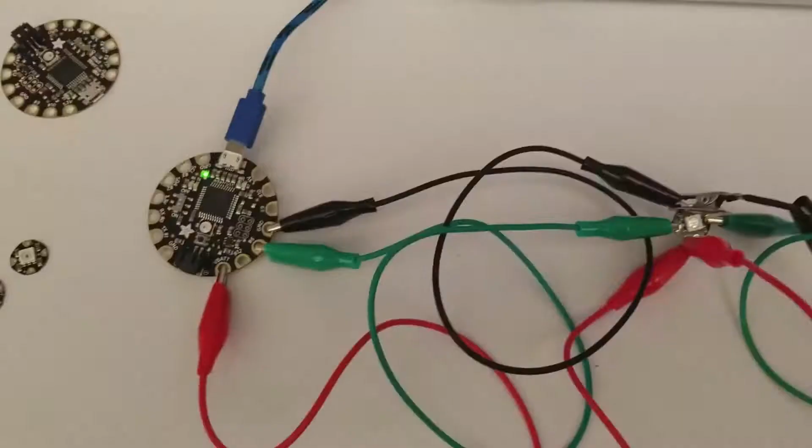I just finished up a personal project, and I'm about to move on to the next one. I actually wanted to circle back and try my hand at a project I had an idea for a while ago. About a year ago is when I started exploring electronics and getting into 3D printing, prompted by my boss at work.

I grabbed a good idea notebook and wrote down some ideas. There's a bunch that I thought and still think would be good, but I just didn't know how to do them yet. Some ideas I started trying and realized I didn't know how to make a specific piece of that, so I thought of a different personal project that would isolate that one piece and let me learn it in detail, then circle back and learn how to fit it into the overall project. This is one of those projects.

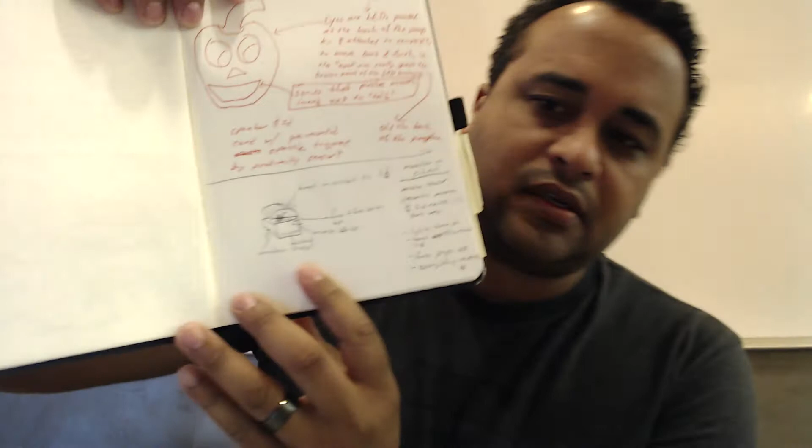So I wrote down in my notebook, it's a little small, but the idea of having a treasure chest with a little demon on the inside that would open it with its claw, maybe have light up lights and then close it, and put a little sensor on the front so that when someone walks by, the demon would open. Maybe play sound, maybe rattle the box a little bit. I'm not totally sure, but the core functionality was opening and closing the lid of the box.

I didn't want to do just a servo that pushed open a lid and wasn't attached, because I knew I also wanted to potentially do projects where maybe the lid was on the side, opening like a drawbridge to open and close. Basically, I wanted discrete control over how the lid was opening and closing, and not be dependent on gravity to hold the lid down. So I couldn't do that whenever I started.

I tried laser cutting some parts to do the 4-bar linkage idea to open the lid, but I just didn't know enough about creating that, and made a couple of projects that kind of bent themselves in ways that weren't desirable. So I set that aside and came back to it later.

Now that I have a little better grasp of Fusion 360, I've been able to circle back to this project, not because I've gained a lot of knowledge about 4-bar linkages. I have a friend who told me about the idea, explained it and actually gave me the pages to calculate the linkages, but I only have a really small period of time, usually in the mornings right before work, to work on personal projects. Sometimes in the evening, but the only dependable time is in the morning.

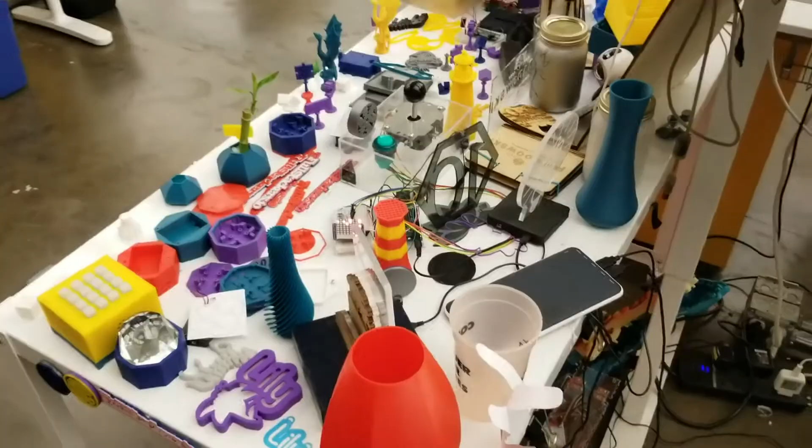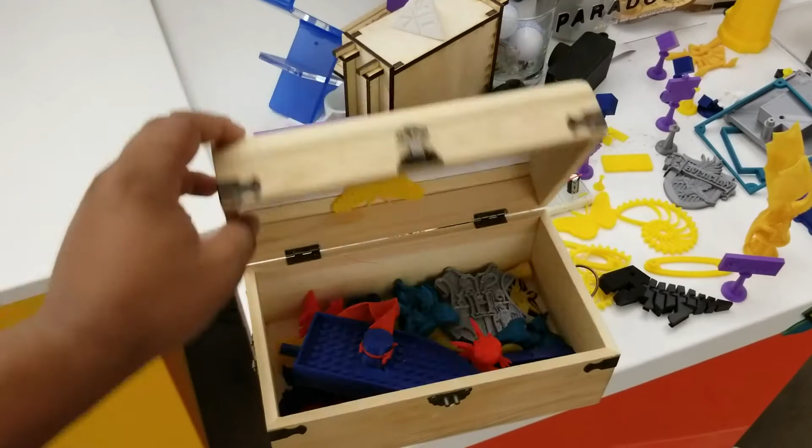So this is my side table at work, and one of the things on it is this treasure chest that I use to put extra 3D prints that I do whenever I'm not printing an actual job, that I set out here so the kids that come through the office can grab a toy.

And I actually got this for one of my early projects, which was to try to make a box that would stay closed, and then I could program to have a sensor on the front and then open, and have like a little thing on the inside that was lifting the handle and then close on command, and either run that from a sensor or run that through a socket connection so I could trigger it from a web app or a phone or something like that.

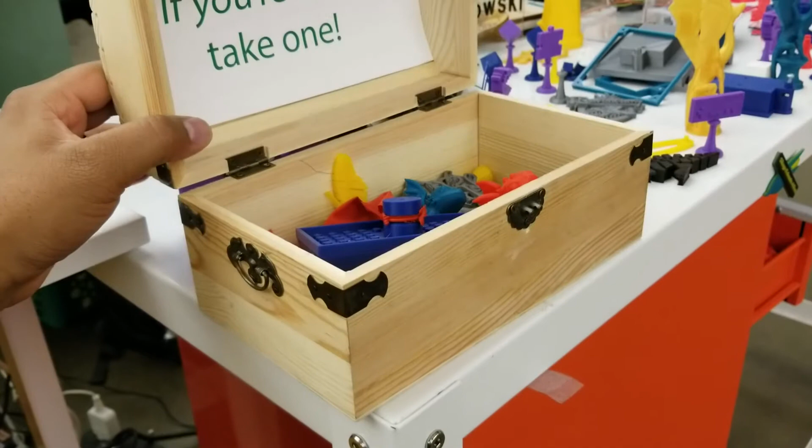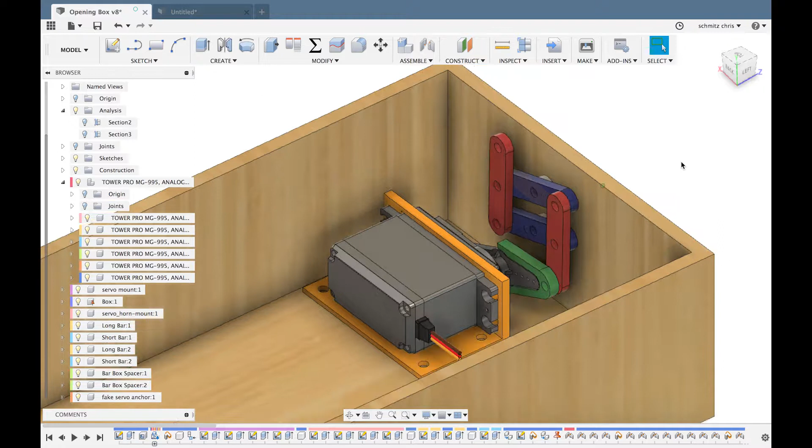I was early enough in my electronics learning process that I didn't really know how to accomplish that, but I'm getting close now. So here's a model that I rattled out last night. This is really just a rough sketch to get the concept into Fusion.

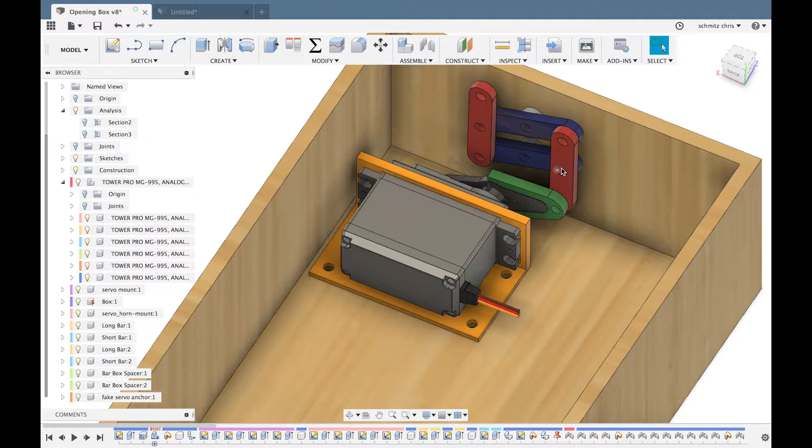I'm probably going to go back, blow all this away, and start over, modeling the actual thing. I pulled a 3D model of a servo from GrabCAD that I have in my workbench, then created a servo mount to mount it into the box, a servo horn mount, and then each of the arms for the 4-bar linkage I wanted to build out, plus little spacers for when I attach this to the side of the box.

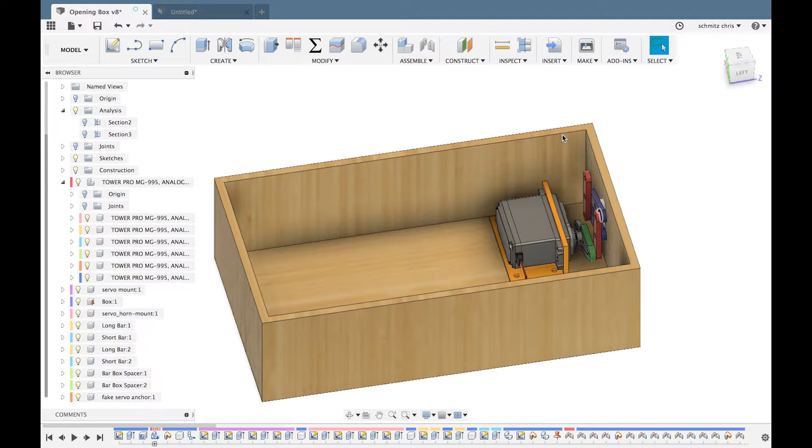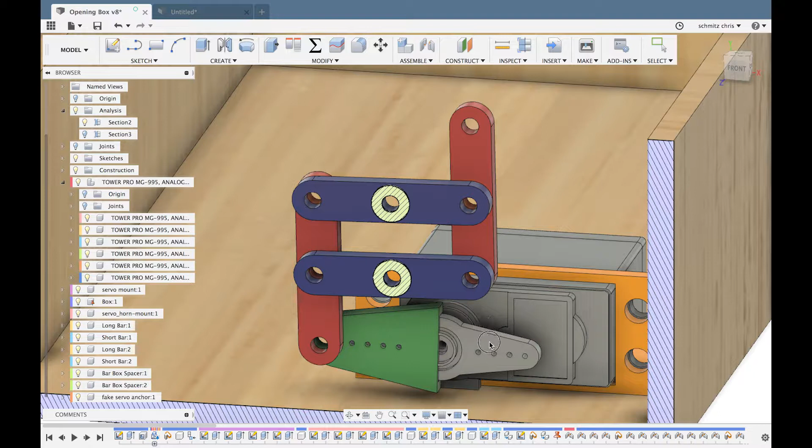There's something that I did that messed up the joints, or at least messed up the freedom of movement for the joints. I should be able to move it more than this, but I can't at the moment, and I think I really just added too many joints. But the general concept is there now.

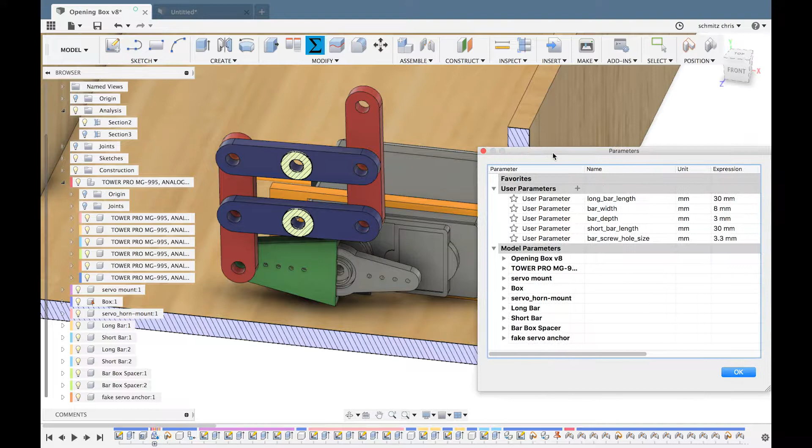Something else to point out is that the whole model is parametric. I pulled out the dimensions for all of the bars into user parameters, so I can come through here and make adjustments as needed to the bars and feel out exactly how I want things to fit together.

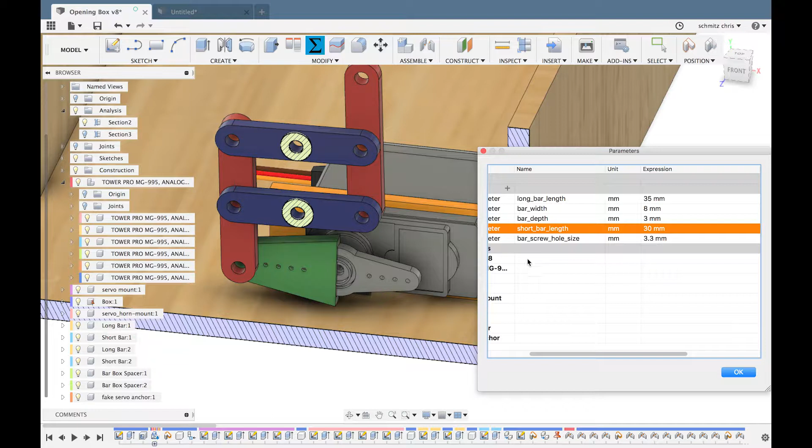So the length of the 2 sets of bars, the red bars and the blue bars, are the long and short bars, and they all have a consistent depth and width. That's the whole thing, and I want to show how I built all this.

I'm going to pop open a new document and walk through how I created the bars and how I can adjust them using the user parameters. So I'm going to pop open a new document and define some of these user parameters.

You could do this up front. I like doing it up front in this case because I know the things I'm going to want to be able to adjust without having to go back in the history, but you can also come through and add these in after the fact. So I know I'm going to have a consistent bar width.

We'll make it 3, and bar depth, make that 3. Actually, let's kick this up to 5. And then I want 2 sets of bars: I want the long bar length, which we'll do at 30 for right now, and then a short bar, we'll do that at 20, and then we can come back and adjust these as needed.

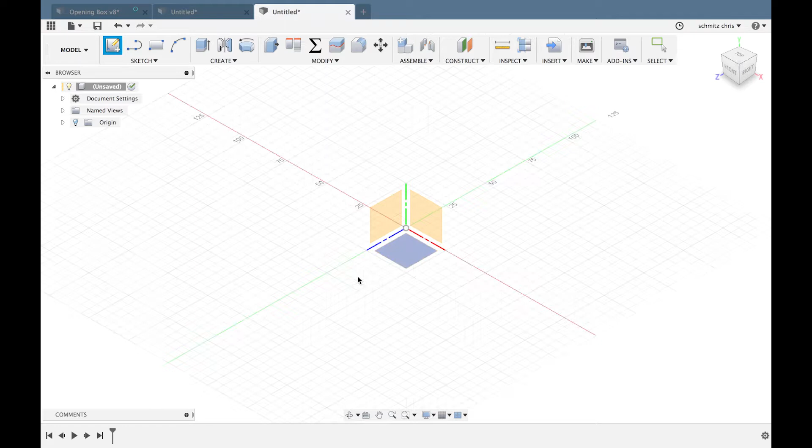Now that I have those defined, I'll create a new sketch. It doesn't really matter which plane you're on, so we'll just start on this one. The first thing I'm going to do is grab a center-defined rectangle. You can hit S to bring up that little palette.

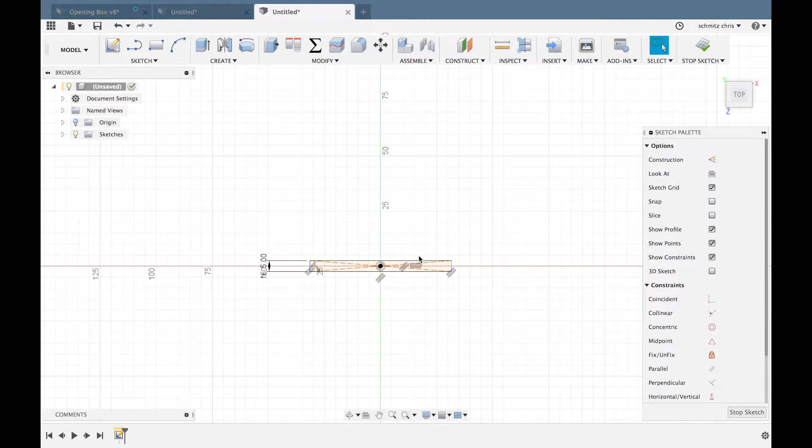And then I want this to be the bar width. Oh, I forgot to switch over to dimension on the other side, so I'll do the long bar first. So now we have our bar defined, or the main body of our bar defined.

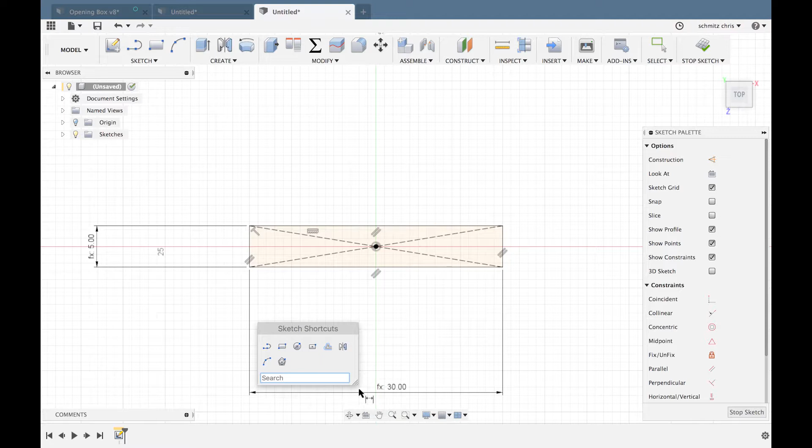So we just need those circular ends and the screw holes. I'll grab a center diameter circle, and at one end of the bar I'll pull this out and hit the D key so I can redimension it, and set that to the bar width as well. We could use a coincident constraint to pull one of the edges of the circle to the edge of the bar, but we've already got the dimension, so might as well use it.

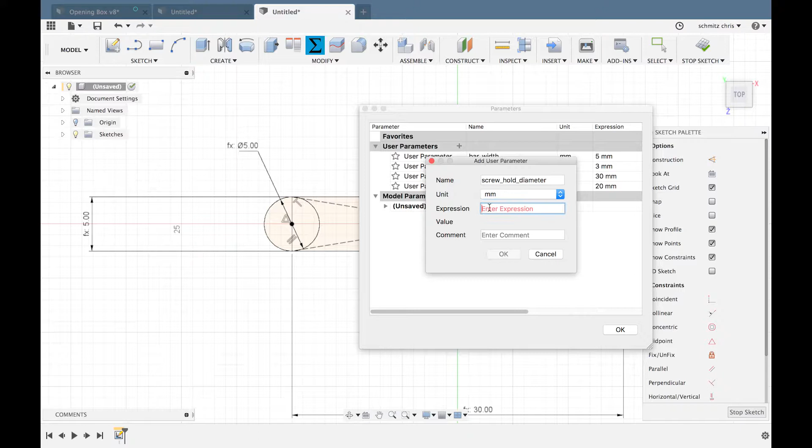One thing that I forgot to define was the screw hole diameter. I know I'm going to use 3mm screws, and I'm going to give it just a little bit of clearance for the tolerance for my 3D printer.

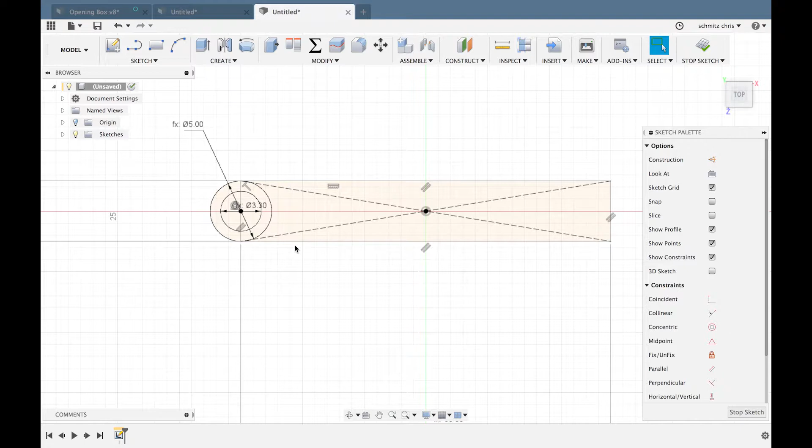We'll pop open another center point circle and put that in. So now we have one side defined, and I want it to be mirrored onto the other side. So rather than drawing all of this over again, I'm going to grab the line tool, which is just L on your keyboard, and put a line down the middle of this bar. You can see that it has the midpoint dimensions here, so we know that it's in the exact center.

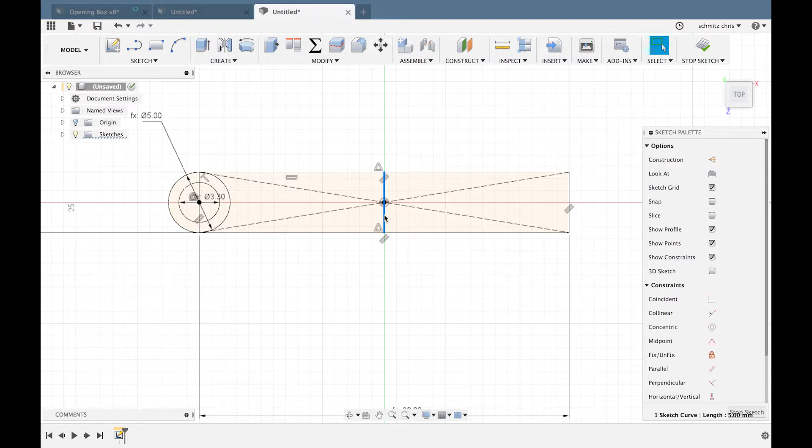I'm going to click on that and turn it into a construction line, because I don't really want that for the form of the shape that I'm making. I just want to use that so I can then use the mirror command. So I'll select the two circles that I want to mirror, and then I will mirror it across that construction line that we just drew.

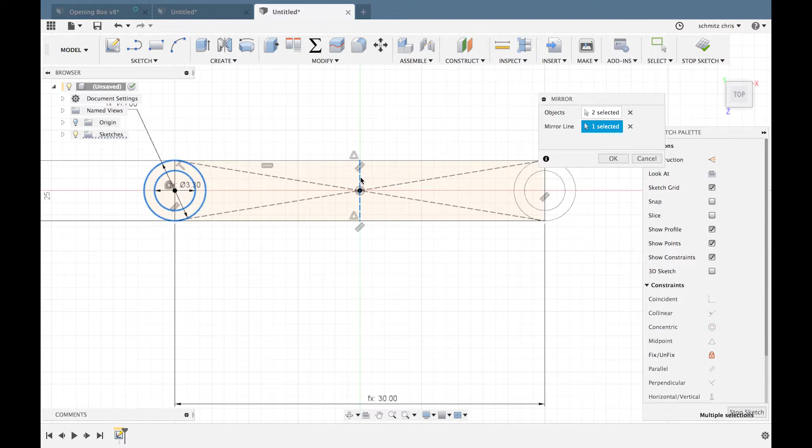Sometimes whatever you had selected before will be included in the objects you select. So you can either click back up here and unclick that, so we're back down to two objects and now the line's free to mirror across, or you could just clear it out and select the lines again. Either way, we'll grab the two circles and then grab that center line, and we can see a preview of that mirror.

So now that we have that whole thing set up, we can extrude that out into 3D space. I'll grab just the parts that I want. Notice how, because it is a construction line, it doesn't split this part of the profile into two halves. And I'm going to pull it up to bar depth.

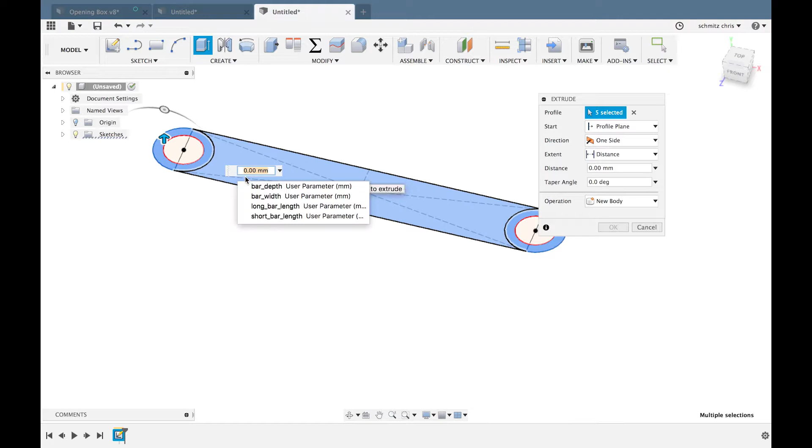Right, so we have one bar. And from here, we can go through and adjust things like, let's double that, make it a little bit hardier.

So this is looking good. One of the things I forgot to do is turn this into a component, because I know that we're going to duplicate it. So I'm going to create a component from the bodies and call this long bar.

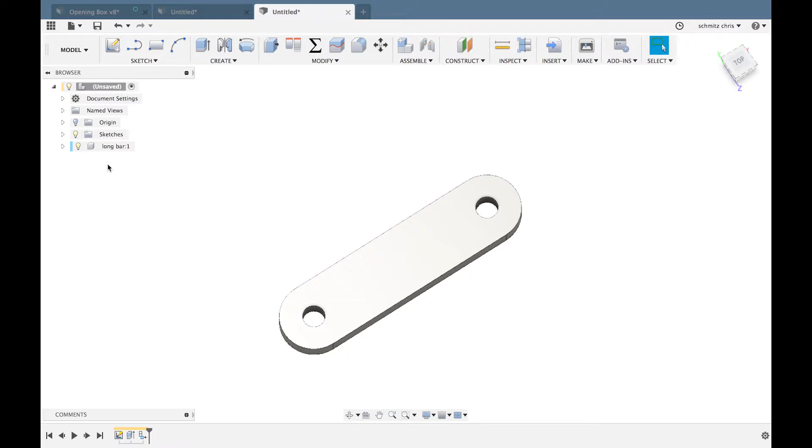So now we can come through and make a copy of our long bar. Whenever you do a move copy, one of the things you want to do is immediately before you move any of the dimensions, click on create a copy, so that whenever you pull it out, you're actually pulling out a copy instead of moving the original long bar. So this creates a copy, and when I say copy, I really mean copy.

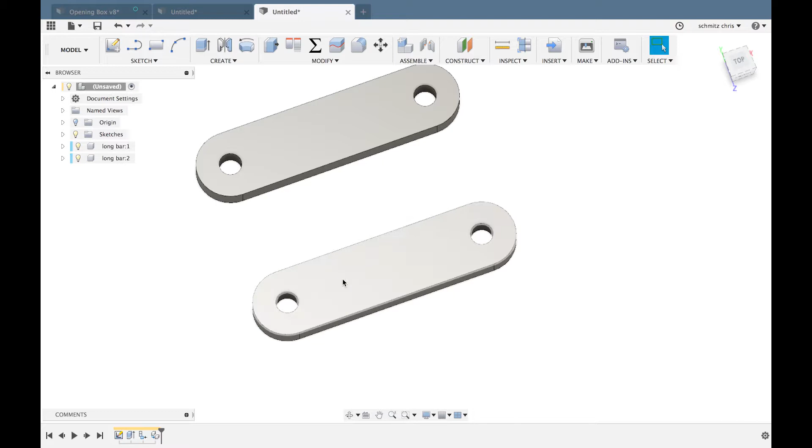So if we go through and, well, not even change the original sketch, if we go through and add a sketch and change the component itself, like if we put in the center screw hole that I forgot to add, and then extrude that, we'll use that to cut to the other side of the bar.

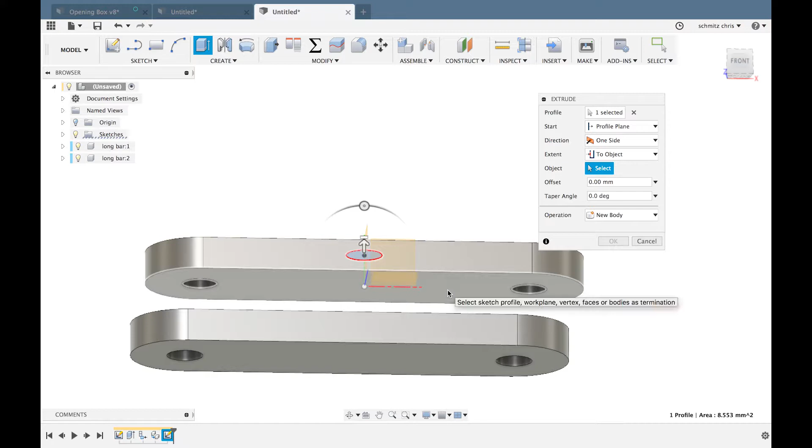Notice I'm using the to-object option and using the other side of the bar. That way, as we adjust the bar depth, this cut will continue to go all the way through. So if we go ahead and cut that out, notice that it gets added to the other copy as well.

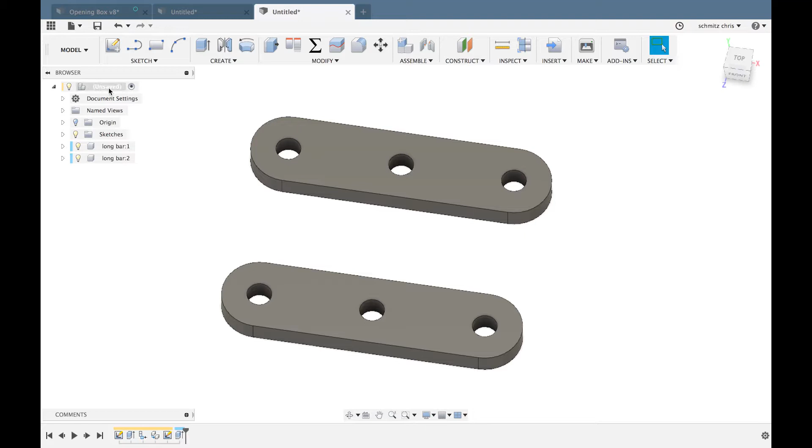So now we've got two long bars, so let's go ahead and create the short bar. Instead of creating another body, this time I'll add a new component right off the bat and call it short bar.

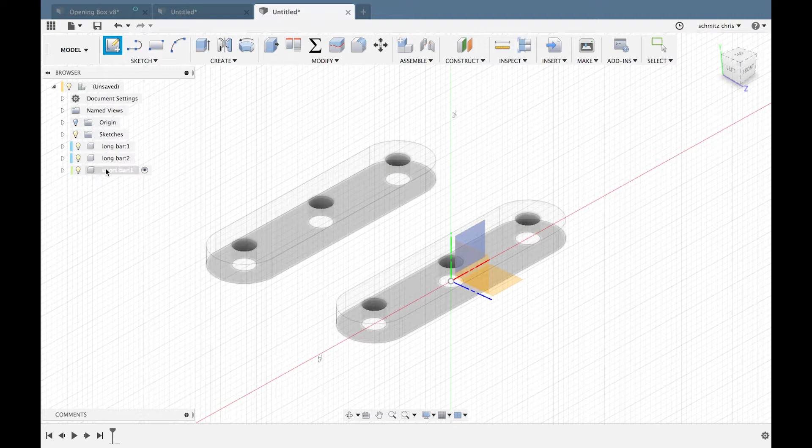And I don't want to start from the origin plane here. I know that I'm going to want this to line up with the bars I just drew, so for the new sketch that I'll be creating for short bar, I'll just use the top of one of the long bars.

And that way you can see we're drawing on the top of the bar and not on, let's see if I turn the origin back on. We're drawing on the top, it's kind of hard to see that. We're drawing on the top of the bar and not on one of the origin planes.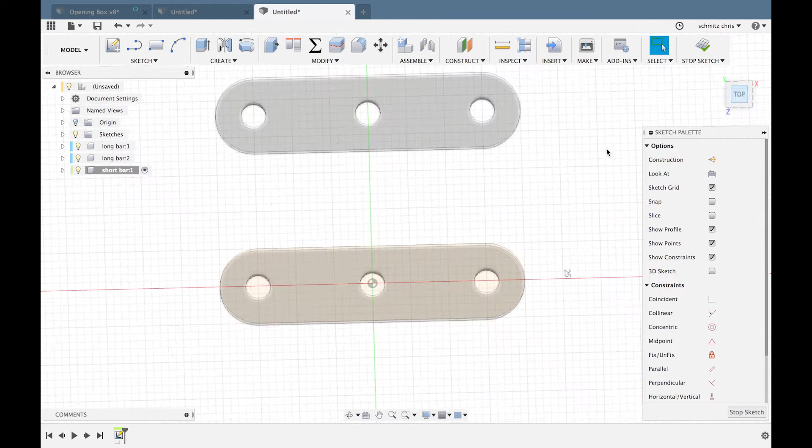So now I will create a short bar. I don't really need to line this up with the long bars, but I'm going to do it anyway just to shortcut a little bit of this, because I only have a little more of lunch to finish recording this. So we'll do bar width.

In this case, I'm going to start with the circles just to be a little varied in how I'm doing it. Make this a screw hole diameter.

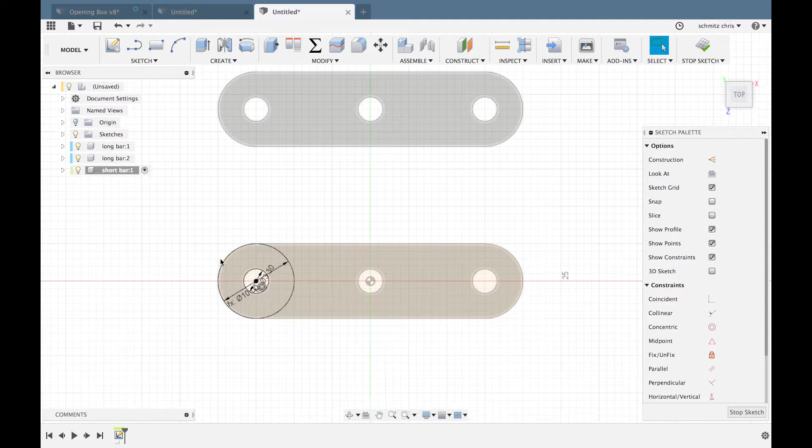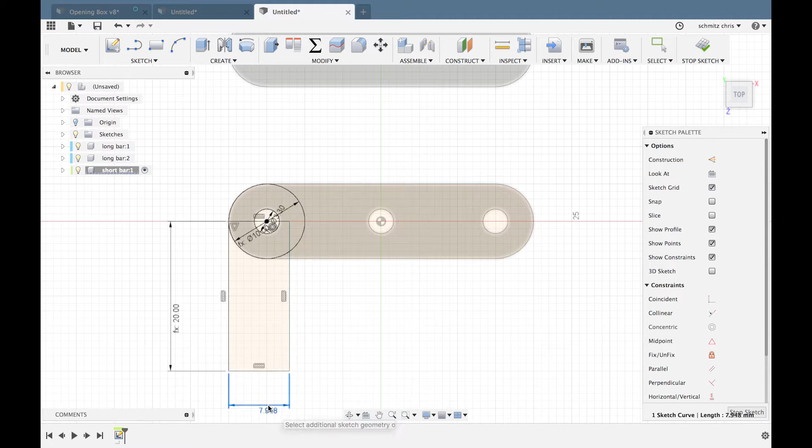And then I'll grab another rectangle and hang it off here. Forgot to dimension it, so I'll hit D and make this short bar length. And then the last thing would be to make this dimension the bar width.

All right, so same thing we did last time. I'll grab the line tool, throw a line across the middle. This time I'll leave it as a regular line. You don't actually have to turn it into a construction line. It's just kind of informative whenever you do turn it into a construction line, plus it doesn't split the profile.

So I will then grab my mirror tool and grab the two lines that I want to mirror, and then that center line that I want to mirror across, and now I've got my short bar.

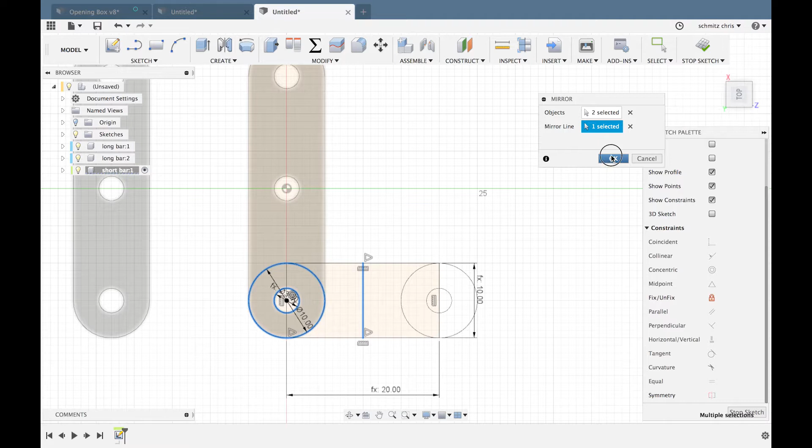So I'll extrude that into 3D space. And yeah, notice that because it's not a construction line, these are two separate profiles I need to grab now, and grab that last little chunk and make this bar depth.

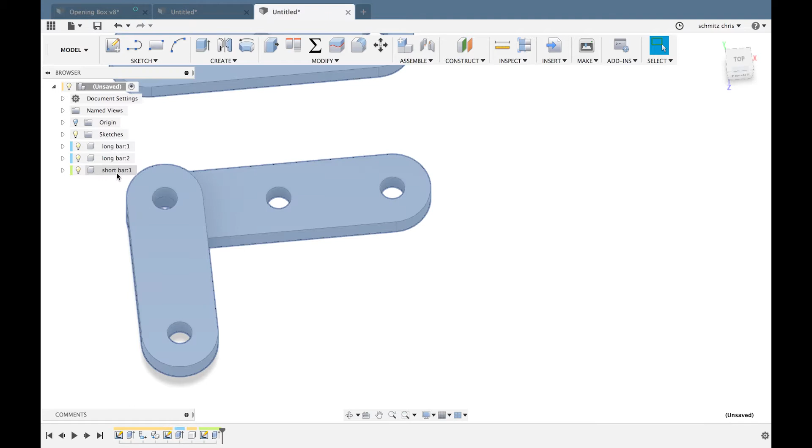All right, and then like before, I can go through and create a copy of the short bar. All right, so we've got our 4 bars. They're all parametric. I can go through and adjust various settings and see them play through.

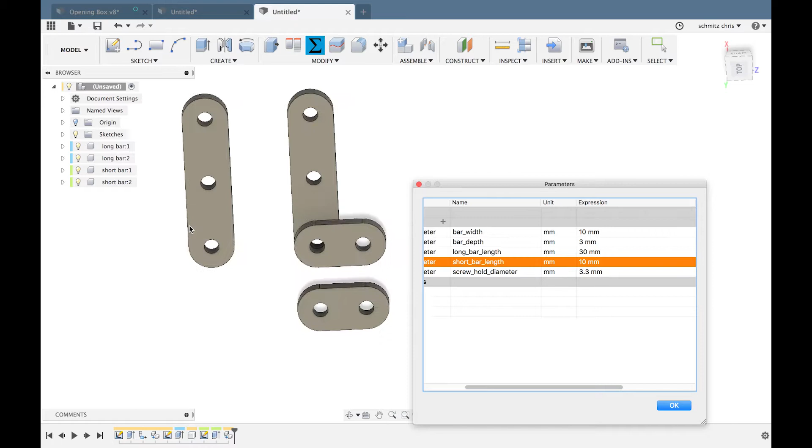Okay, just to give us a little more room. So now the last part is to joint these up. So right now these all move independent of each other, and that is not what we want. So we'll go through and start adding joints.

So the joint that we need for this one is revolute. There are a bunch of different ways of jointing, basically joining 2 parts together and then defining the relationship between them as far as how they should move. So we want the revolute. We want these all kind of revolve around each other.

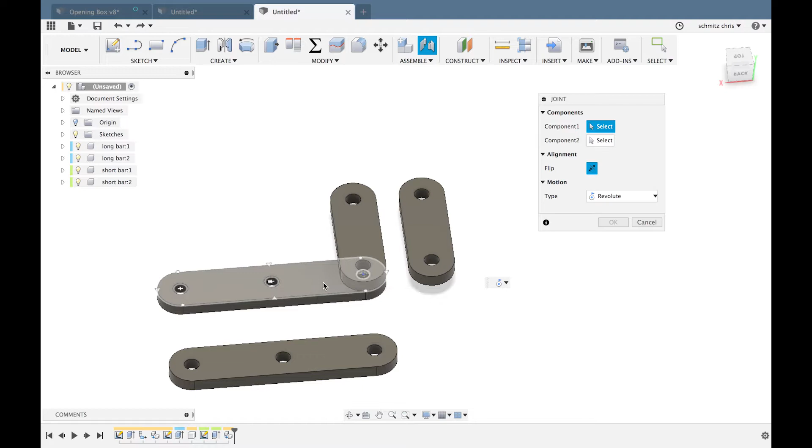So the basic steps are: create a joint, pick a profile that you want to put it on. I want to get the center hole for that body, but it's covered by this one. So what you could do is hover your mouse over the profile that you want and hold down the Command key on Mac - it's maybe the Control key on Windows, I'm not totally sure. That will snap you into different points on that profile, and that'll allow me to grab that center circle, and then do the same for the underside of the other bar.

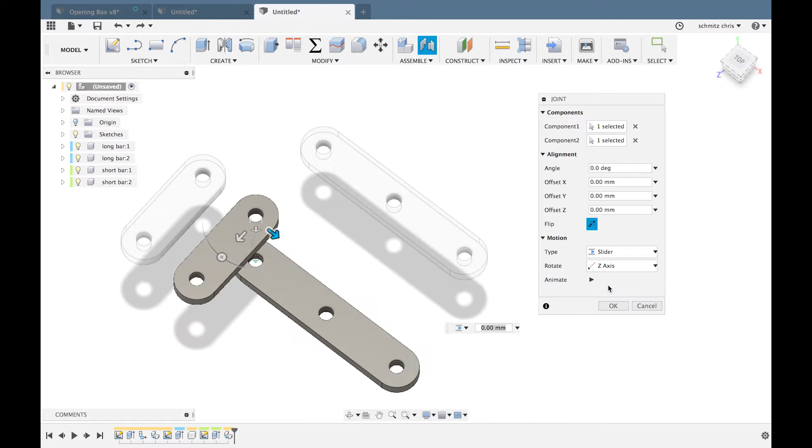So we get a little preview animation of it going around, and the sides actually matter. So we want to attach this profile to this profile. If we attached this top profile to the other top profile, it would flip one of the bars over on top of each other, so be aware of that. This is a good time to come through and check out the different types of joints that you have, to see exactly what they do to your parts. These animations are fantastic as far as getting a visual idea of what each of those joints do.

So now that we have 2 of our parts joined together, we need to go through and tell Fusion which one of these parts should be grounded so that everything else moves relative to it. So if I grab these two parts that we joined together, you'll notice, one, we're not getting that revolve we added for that joint - it's not revolving around anything, it's just moving the entire parts. And two, you can see by the shadows that we're moving the 2 parts in 3D space, and that's because we haven't told Fusion this part should be attached to the ground.

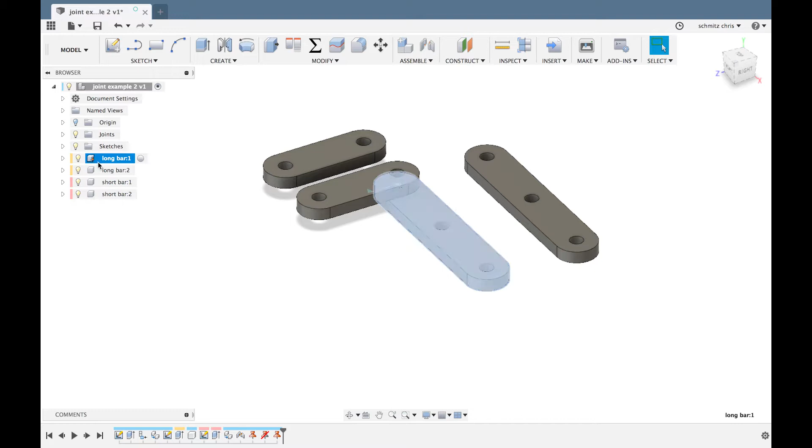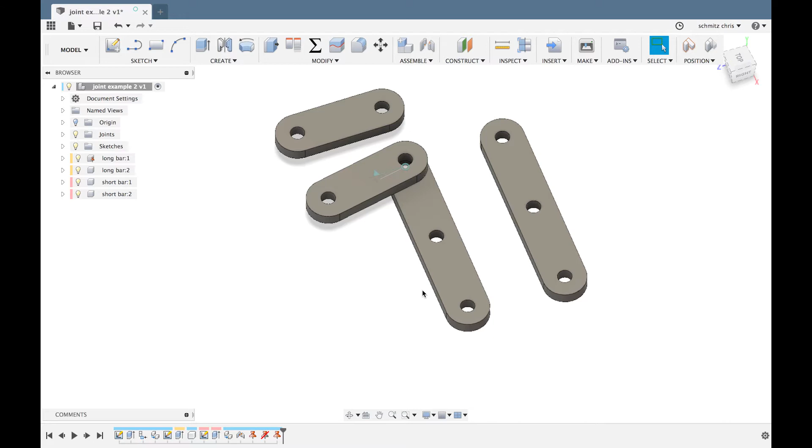The way we can do that is to right-click on one of the parts—I'll do it on just the first long bar that we created—and select the ground option at the top. That puts a pin into this component and attaches it to the ground plane. Now we can move that second part relative to the other one, because we know the first one is going to stay put in the ground. As we add more joints, everything moves in a way we'd expect because this part is grounded.

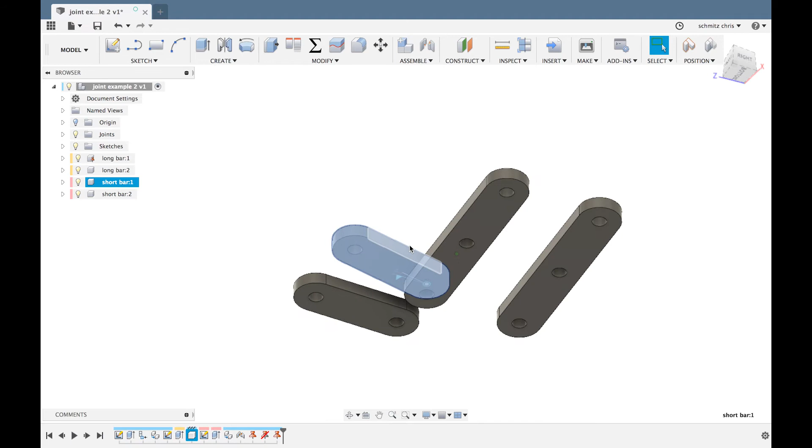You can also go through and unground parts if you want, or ground multiple parts if there were multiple things that should really be pinned down that would affect the joints. But in this case, we just need one bar that's grounded. So I'll go through and start adding the other joints.

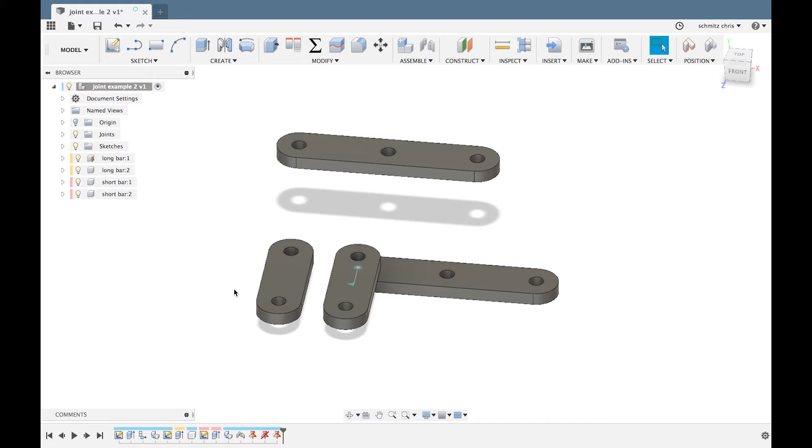This threw me off when I first started using Fusion—the concept of capturing the position. This happens because Fusion lets you pick up and move stuff around freely, and it doesn't record that in the timeline. Sometimes you just want to move things around to get an idea of where they'll be placed, or rotate them because that's part of the functionality, but it doesn't actually need to be captured in the history. You're not actually adding something to the steps necessary to create the assembly you're making.

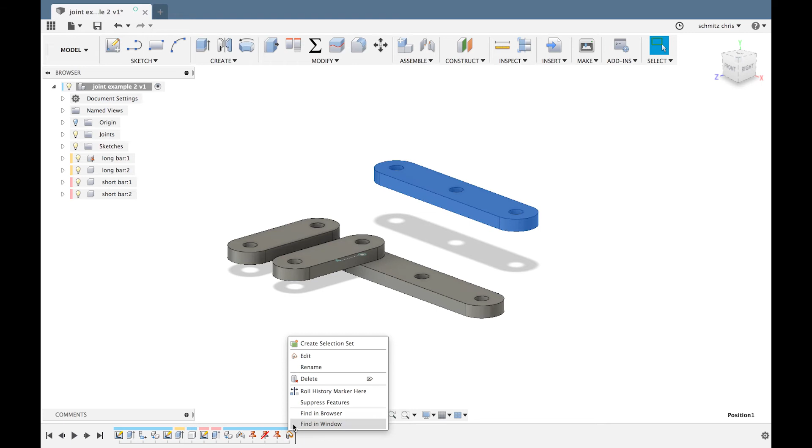It allows you to free-float these parts around, and then asks if you want to capture that position—I've moved this part into a specific spot and want to capture it in the history, or you can cancel it and move it back to where it was. If I hit capture position, you'll see a little capture position marker down in the timeline, which takes a snapshot of all the pieces in the assembly as they are at that moment. Now when you play back and forth, that position is captured. In this case I don't necessarily want that capture, so I'll delete it. That's what threw me off for a while when I first started using Fusion.

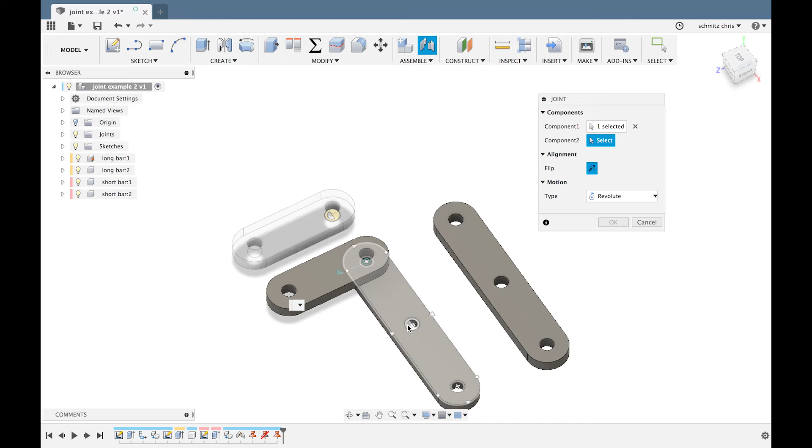Now I'm going to joint up the second short bar. We'll grab a joint here and attach it to the top. We'll get our revolve, and then do the last part, which is the two holes on the second long bar.

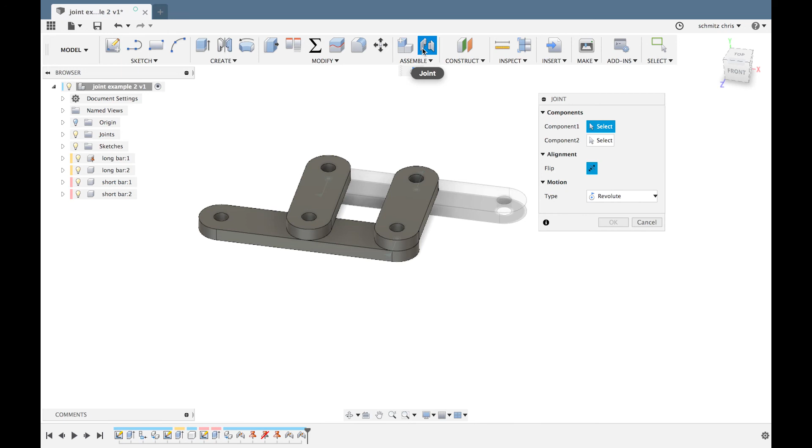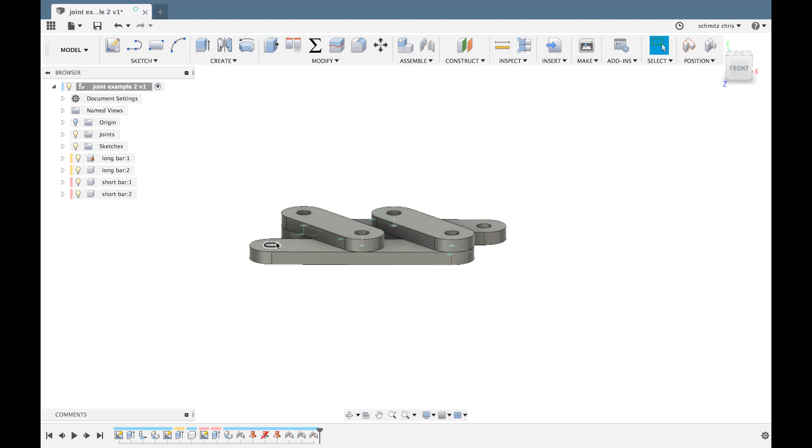Now we have all our pieces joining together, and because that first long bar is grounded—set as ground in Fusion—I can grab this bar and get the rotation or movement action I wanted. As I add that servo horn, I can unground this bar and ground the servo horn, or ground the axis instead, so I can move around what's grounded to get that full range of motion.

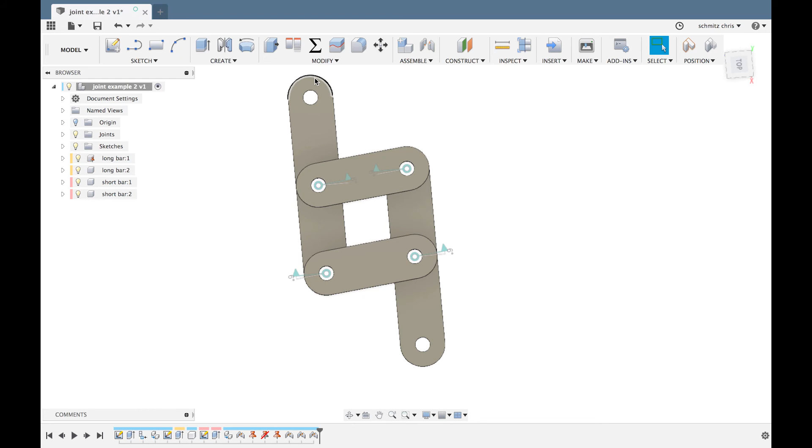This lets me come through here and test out different bar lengths, adjust them if I print it out and the final version doesn't work the way I expected, and really just play and experiment in this consequence-free world before I take it to a 3D printer or laser cutter and make something real out of material I'm using up and potentially ruining, potentially incurring costs.

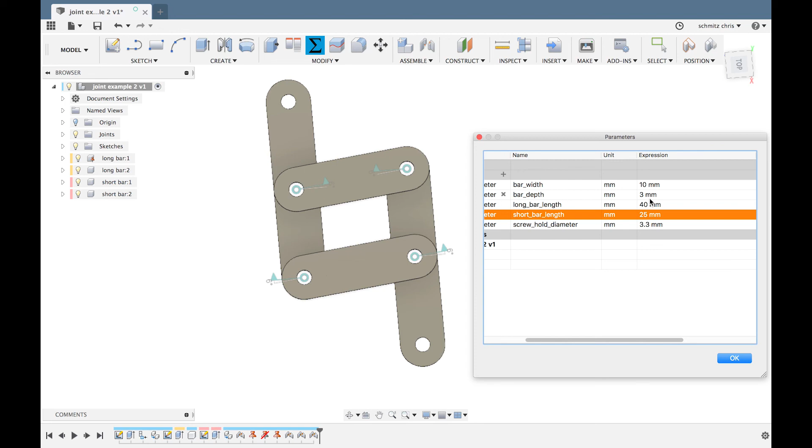So that's it—hopefully that was helpful. It's going to take a while for me to build this project out.

I usually do this in 30-minute sprints in the morning before I work, so I'm pacing myself, doing some research, reading, and modeling, then printing and doing tests and stuff like that. But I'll make sure that as I step through this project, I keep recording and updating the channel so you can see what I build while I build. Hopefully that provided you some light inspiration.